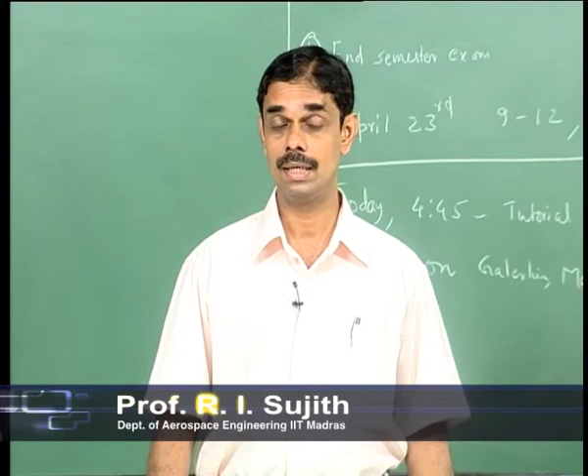In the beginning, we came up with two techniques. One is a frequency domain analysis, or the harmonic domain analysis, which we went after doing with eigenvalues and so on. Afterwards we did analysis in time domain, and we looked at not just normal modes, but the problem with having non-orthogonal eigenmodes, and a lot of machinery associated with analyzing such a problem.

But in either approach, whether time domain or frequency domain, we need to supply a model for heat release, which depends on how the flame responds to velocity or pressure oscillations around the flame. In different combustors, this mechanism differs. For example, in a rocket motor, the propellant responds heavily to pressure oscillations, because pressure fluctuations alter the way the flame stands above the propellant surface, and this has a strong influence on the reaction rate and the mass flow fluctuations coming out of the pyrolyzed propellant.

Now, whereas we looked at premixed flame, where the pressure dependence is very weak but it is mainly a velocity fluctuation dependence. Velocity fluctuation affects the flame through some kind of wrinkling, and we constructed a model by solving a kinematic model. We solved the G equation for the wrinkles, and saw that the wrinkles propagated up with a time lag associated with it. We derived an expression for the wrinkle, from which we can get the area fluctuations, and the area fluctuations translate to heat release rate.

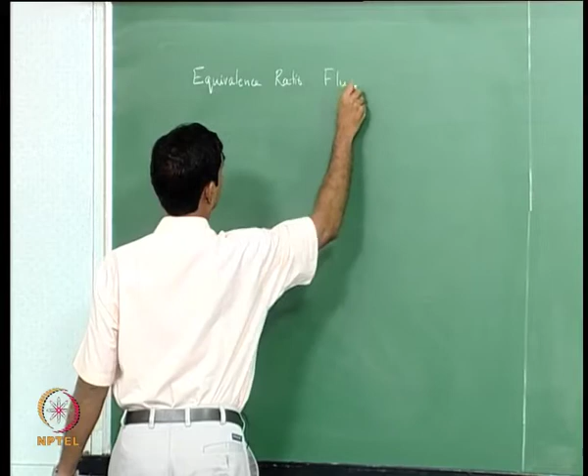So normally we would say that in a combustor, it burns at a certain equivalence ratio. So what is meant by equivalence ratio fluctuations here? You set the fuel flow rate and set the air flow rate, and you have a certain equivalence ratio. So what is meant by equivalence ratio fluctuations? Can you try to imagine? Viksha?

The mass of the fuel and the ratio of the fuel mass and oxidizer mass sort of varies, and it's not burning at... Why is it? Why will it vary? Can you imagine? The pressure fluctuations may pass on to the injector, and that may sometimes reduce the mass flow rate of the fuel and sometimes increase it. Yeah, absolutely perfect. That's a very good answer.

So in the 80s, nitric acid rain and sulfuric acid rain were considered a big problem, and people wanted to make combustors which would lower nitric acid rain. Nitric acid rain means you have NO and NOx going up in the atmosphere, then it mixes with water vapor in the clouds, and the rain has a concentration of nitric acid or other acids. Specifically we are worried about nitric acid here.

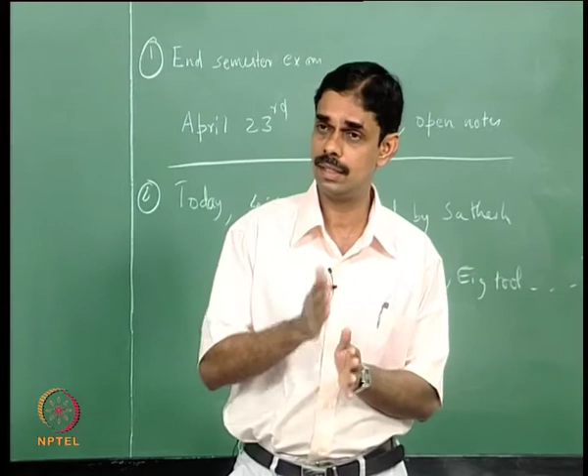Below some limit for a premixed flame it won't burn - that's the flammability limit. People try to do premixed burners because they have low soot production, and if you burn near the lean limit you have very low NOx. That is what they found out.

Now can you imagine why NOx would be low if you burn lean? Low temperature - yes, absolutely. Low equivalence ratio leads to low temperature. You can also have very high equivalence ratio and get low temperature, but then you are wasting fuel and there will be a lot of unburned hydrocarbon, soot, and all that. So we cannot burn rich, so we burn lean.

Now, why would NOx be low when temperature is low? Nitrogen won't react - yes, at low temperature the NOx production is less, so at least one of the ways of producing NOx is reduced. So people have understood that if you lower the temperature of combustion you will have less NOx. So wonderful, you proclaim that you have solved all the problems of nitric acid and so on, keep all the environmental activists and left wingers happy, and then you make these combustors and then some unintended consequence happens.

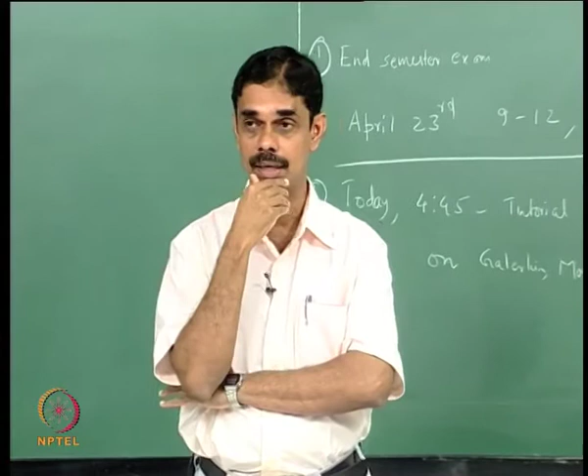What would that be? Instability. So when you go to lower and lower limits, the performance of NOx reduction is very good, but then the flame speed starts to become a very strong function of equivalence ratio, and the ignition time delay is getting bigger and bigger. So these conditions become very conducive to forming thermoacoustic instability.

So that is what we will talk about. Let me first give you a reference for this - it is a very good PhD thesis.

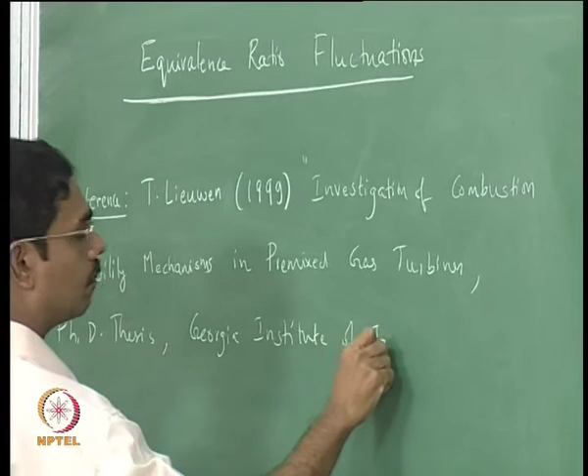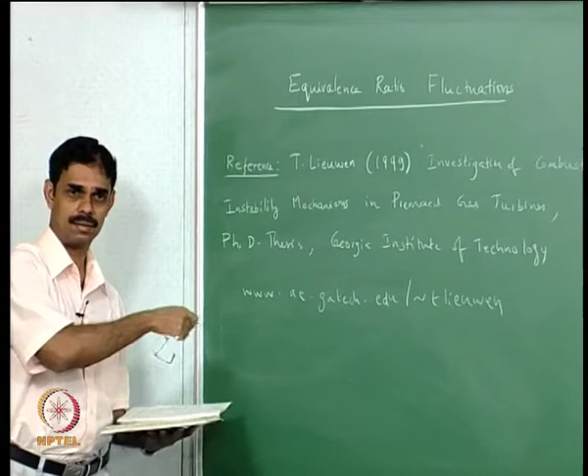You can download it from - so this is a PhD thesis done on the subject, a good slow introduction to it, but there are also a lot of papers on this. I also have to give you some historical insight behind this.

So the combustion instability research was very strong in the 60s and 70s, driven by what? Do you remember? Space program and missile program. The big rocket programs had a lot of instabilities, and they made enough number of motors.

So you try to make a lot of motors, but eventually have certain motors which are working, in which they somehow manage to solve the problem, minimize it, or live with it, and then you can run your program with a combination of this number of motors. If you want to double the thrust, you try to make a big motor. If it doesn't work, put two of the old rockets together, kind of like tied with a rubber band - not quite - and if you want four times the thrust, in case you fail with a big motor, you can put four of the small motors.

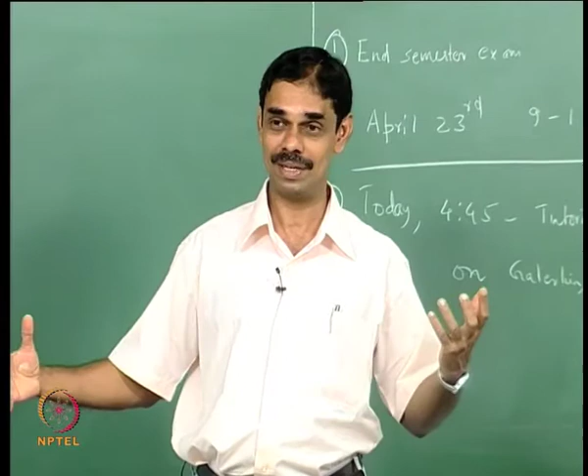Somehow people found ways to get around it, because this is a subject nobody understands. So if you don't understand something, you generally wouldn't feel inclined to watch it. It's like watching an art movie or a sport you don't understand - if you don't understand the rules, the program managers have no clue what this thing is, so they are not interested in funding it because this is always there, but they know somehow somewhere it can be fixed.

So once it's fixed, you use those motors. So what happens to the scientists who work on it? I mean, they are like - I don't know, there's this curry leaf - after use you throw it out. So it's kind of the way it is, because this is a weird subject.

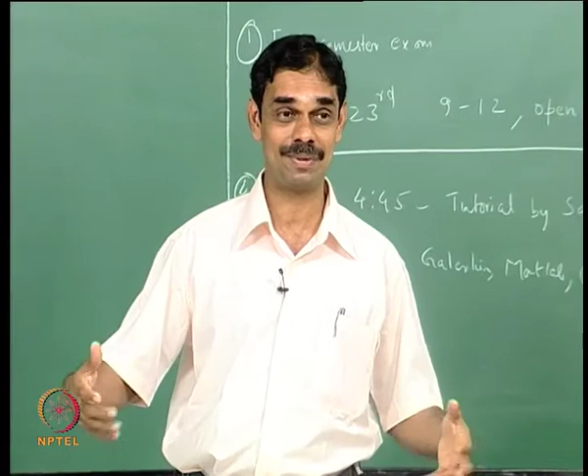It is not like gas dynamics or something where you analyze and from that you can go to propulsion, build an engine and so on. This is like, okay, if something blows up, I can tell you why it blew up or something like that. So we are not doing anything constructive - it's like the role of a policeman. First the robber has to rob, then you catch the thief, and the policeman isn't good enough to intimidate the robber and stop him from robbing. So at least that's the state it is.

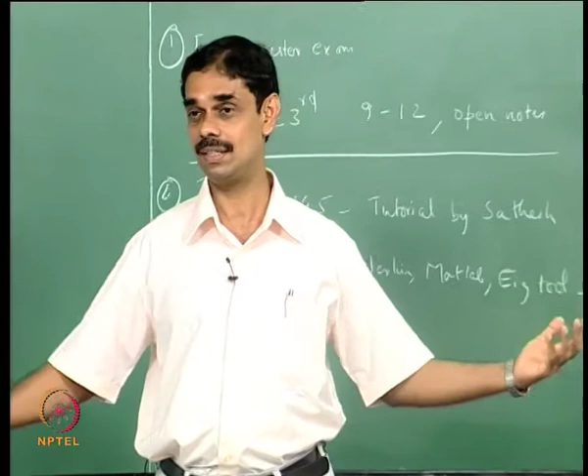And then the research went into a lull, and a few people still hung around trying to do pulsating combustion, using acoustic oscillations to increase productivity, and that kind of appealed to the managers, because when combustion instability happens, your heat, mass transfer, and momentum transfer increases - so it creates all kinds of problems in rockets.

They said, okay, you take a cement plant, you put sound with a pulse combustor and make the droplets evaporate faster, or try to make milk powder evaporate faster, or burn waste in the presence of high amplitude sound. Waste which would normally not burn starts burning because of the intense heat and mass transfer and so on.

So a few people hung around there with this subject of pulse combustion, almost getting out of business. Then came activists who wanted to get rid of nitric oxide, and suddenly the combustion scientists woke up, getting jobless with no new thing. So they proposed this Low-NOx idea, companies bought it, made it, and bang, instability came, and suddenly all of us got into business.

We were almost losing our jobs, because it's like policemen losing their job when there's no crime, and suddenly crime comes and then you are busy. So suddenly instability comes on and people are busy.

So this got everybody going in gas turbines. Before, in the 60s, 70s and 80s, people didn't worry that much about gas turbines. One thing was NOx performance improving. Another thing is, once you have an engine, they will improve this, improve that, and somehow get more and more megawatts out of the engine.

So if some engine starts giving 100 megawatts in the beginning, you tweak it and it becomes 110. There will be version 1, version 2, version 3, then version 3A, B, C, D, E, finally version 6F or something, and by then that 100 megawatts will have gone to 180, 190 megawatts.

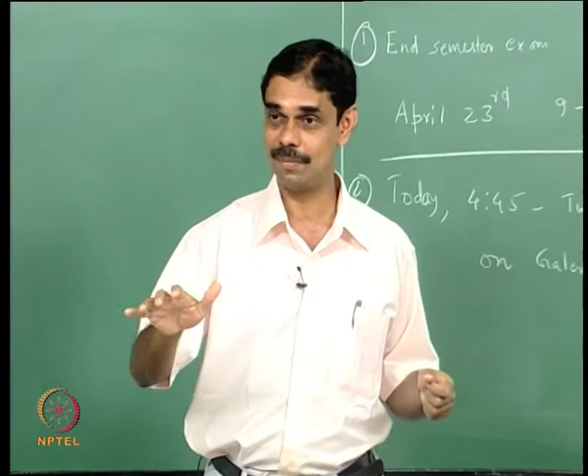So we are really pushing. It's like I told you, if you push somebody too much and they are performing very well, they can go crazy, or like a sportsman, if you push too hard you can get injured right before the tournament.

This is kind of what happened in gas turbines. They were there, but not performing to that level in the beginning. Now they are performing at incredibly high levels of efficiency and incredibly low pollutants, and then instability struck.

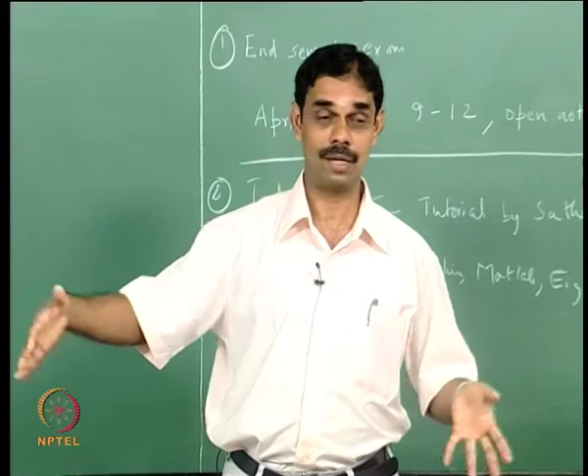So all the guys who were closing their shops with rockets and so on came back to study instability in this, and thankfully the problem has not gone away yet, so we are still in business. I think it's important to understand how the technology evolves, and someday this will be stopped, and I don't know what else comes at that time.

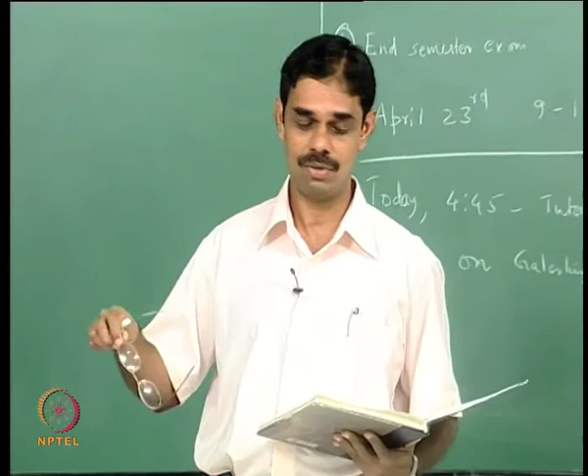So here we are, I'm going to analyze it, but since I will not explain how to do the acoustic analysis again, because I already explained it, what I will do is concentrate on how the heat release rate has to be calculated, or how it is affected by the fluctuations. Then I assume two different methods, one is a time domain analysis, one is a frequency domain analysis, to solve for the acoustic field.

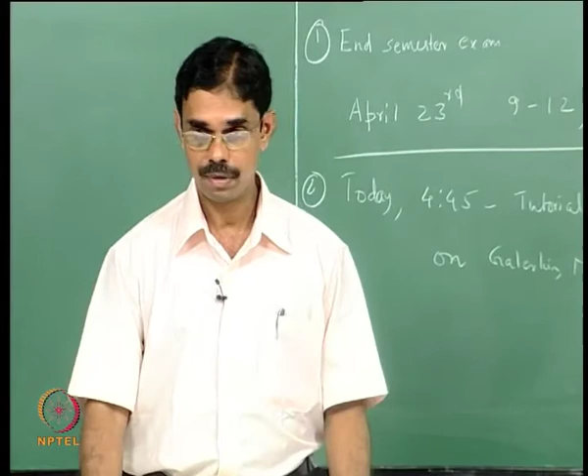So here we concentrate on the perturbations of heat release rate of a flame, with particular emphasis on the role of equivalence ratio fluctuations. Everything is the same, we have feedback between acoustic waves and heat release, and that is what makes the instability. There is no difference in that. The only difference is how the perturbation in heat release is coming.

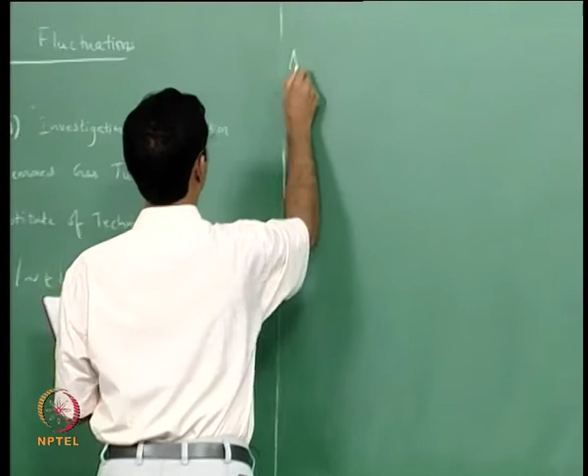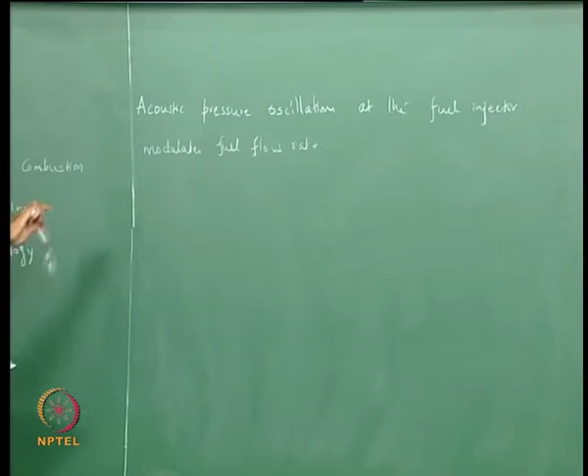Acoustic perturbation of velocity or pressure at the fuel injector, usually acoustic pressure at the fuel injector, will fluctuate, and that will modulate the fuel flow rate. The velocity fluctuations will also modulate the airflow rate. Similarly, acoustic pressure oscillations and velocity oscillations will modulate the airflow rate, and so therefore we will have equivalence ratio fluctuations.

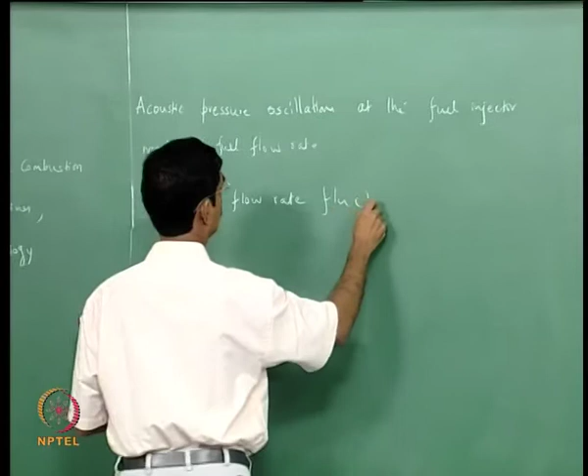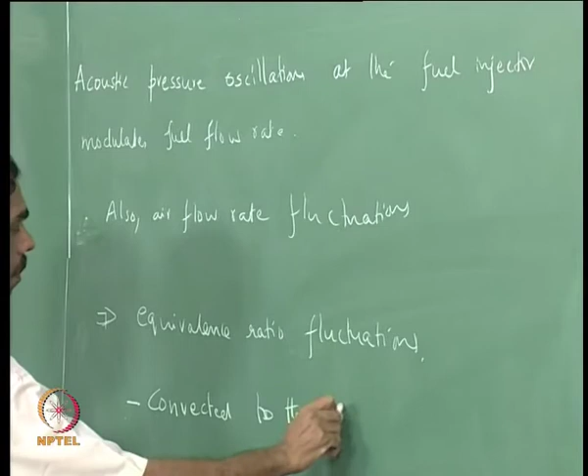So this will lead to inhomogeneities in equivalence ratio, and they are convected through the fuel air premixing section to the flame front, where they modulate the heat release rate of the flame. So these equivalence ratio fluctuations are convected to the flame, and of course there is convection, so naturally there will be convective time lags also.

And we know that we love time lags. If there is a time lag, you have a chance, under some conditions, of things going unstable. This mechanism is very significant in lean premixed pre-vaporized combustors.

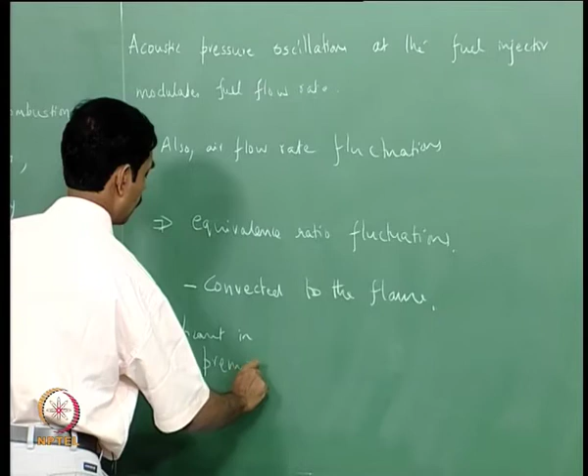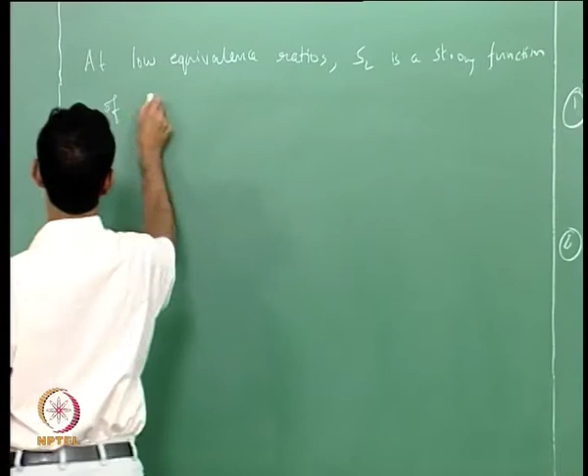I must emphasize that at low equivalence ratios near the lean blowout limit, the flame speed SL is a very strong function of equivalence ratio. So a small disturbance in phi can make a large disturbance in SL, which will lead to a large disturbance in heat release.

So I will draw a schematic of this combustor. We will draw a schematic of a combustor. I am sure the actual combustor is much more complicated than this, but...

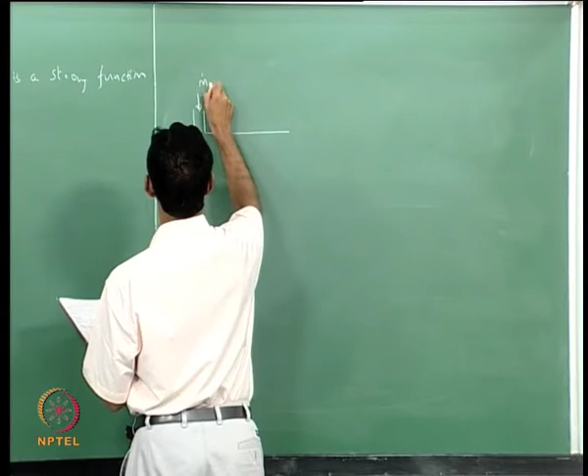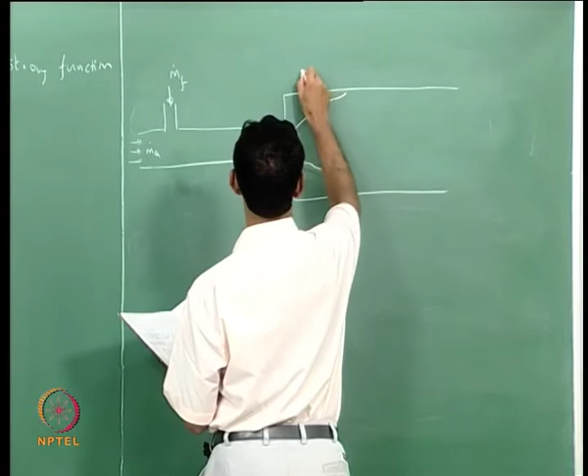So this is the heat release zone. There will be Q prime here, and there is phi prime coming here. Now, subscript I denotes fluctuations at the inlet. That's it.

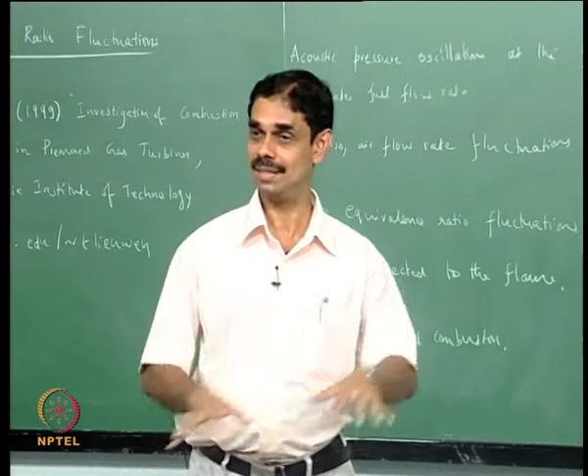Before I speak further, I want to ask a simple question. You have a separate fuel line and separate air line, and I showed you an example of a combustor where we had a pre-mixed flame, with a pre-mixer, then another mixing chamber to damp out everything, and then the tube coming, and it was absolutely pre-mixed. Why are we calling this combustor pre-mixed, although we have air flow rate coming here, mass flow rate, and fuel flow rate coming separately? Why do we call it that?

By the time it reaches the combustion zone, it's mixed. So why don't you mix it in a big tank and send it? This is not only about safety - in cases of aircraft combustors and all, we have air coming in, so fuel we have to mix on the way.

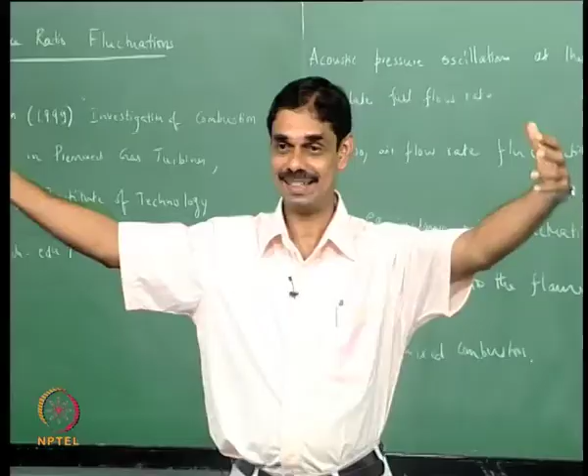Now you can make a big box or big tank and mix the fuel-air mixture instead of having a fuel cylinder. You can control the equivalence ratio based on demand, and switch off the flame whenever you want. In the other case there will be a lot of... you can turn it off with a valve. But one important point is you can make a very fast local adjustment of equivalence ratio. If it's in a big tank, it will take quite some time to adjust things.

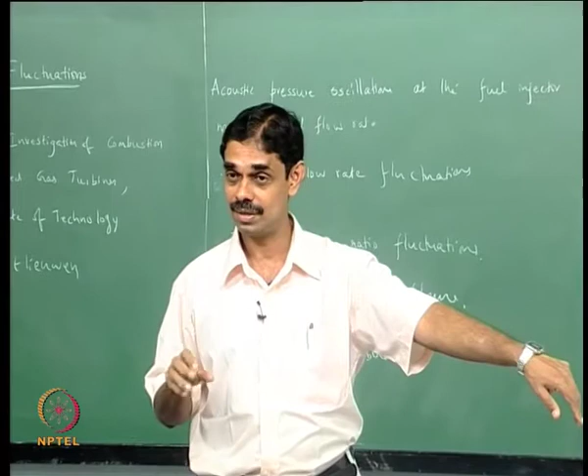In an aircraft, you cannot have a separate tank, so these combustors are used in aircraft. It is not a premix flame, by the way - it is a diffusion flame, burning liquid fuel, so we are not talking about that. We are talking about gas burners which burn natural gas or whatever gas is available - mostly a gas burner. Even if it's a liquid fuel, you can have injectors here to pre-vaporize the liquid - LPP stands for lean premix pre-vaporized. Or you can have natural gas coming in.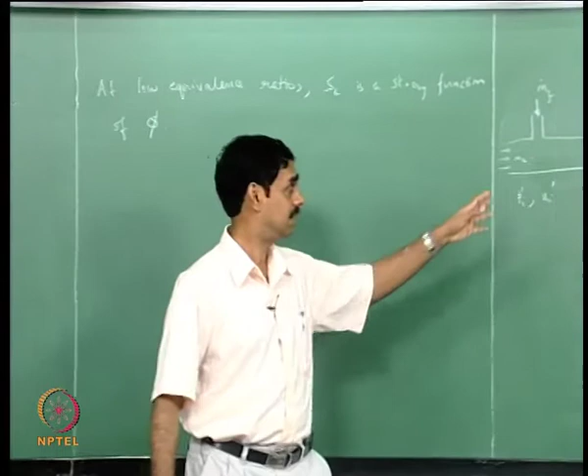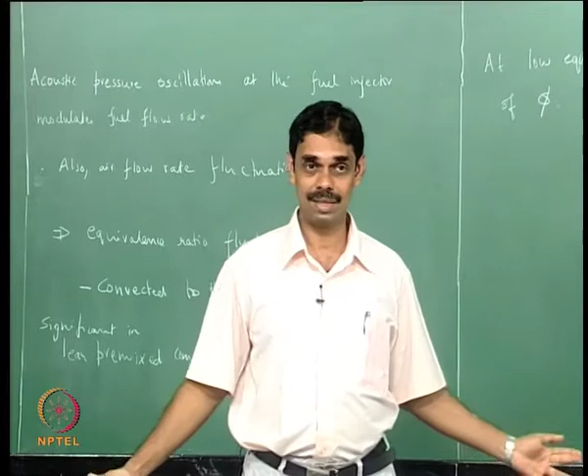So why are we not calling it a diffusion flame or non-premixed flame, given that it's mixed in this tube? I think safety is the predominant reason - these burn a very large amount, several kilograms per second, and big ones may burn hundreds of kilograms per second or even tons per second. So it's a lot of mixture, and if you have a big cylinder, you'd have to pressurize it because otherwise you cannot store it - storage volume would be huge. If there's an explosion, it would be unbelievably damaging. Even with protection, this approach just isn't viable.

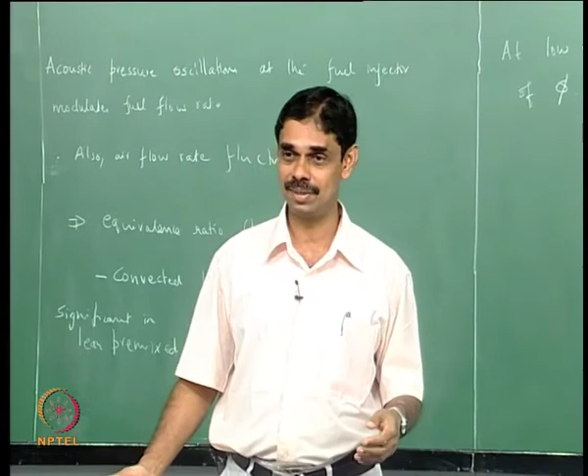So this is called an industrial premixed combustor, or the Germans call it 'technically premixed' - a lot of Germans worked on this, German and Swiss companies like Alstom. That's German English, like how Germans call industrial aerodynamics 'technical aerodynamics.' But that name is now in English usage. So it is called industrially premixed or technically premixed - by the time it reaches here, it's like premixed. I hope this is clear.

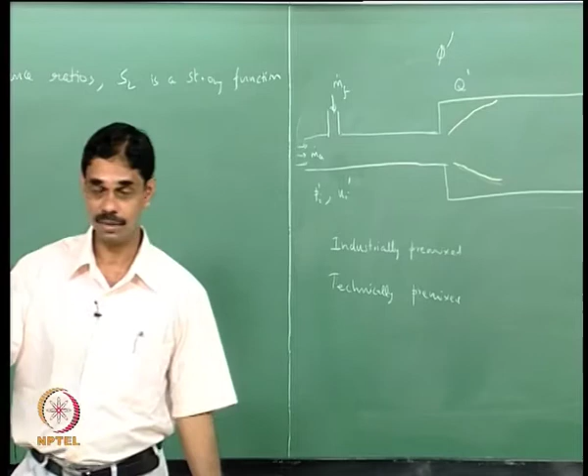So the fluctuations in equivalence ratio are created or generated by acoustic waves. They travel upstream in the combustor and come here - that's what I denote by P prime and U prime. Some of the waves come here and modulate the fuel and air. So how does it physically modulate the fuel flow rate? Anviksha already answered it - can you repeat the answer? Is it the velocity or the pressure which modulates the fuel flow rate, and why does it do it?

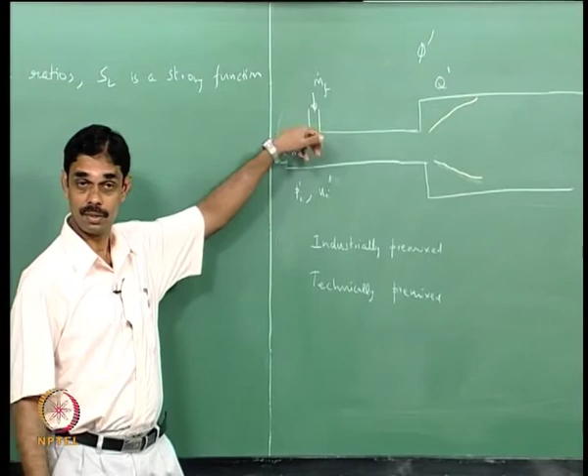Sometimes more fuel comes faster, sometimes less. When is more fuel coming and when is less? When the pressure goes to a minimum, it allows more fuel to come. So when pressure here is low, you have a higher delta P, and so more flow rate comes. When you have higher pressure, at the acoustic wave's maxima, there's less pressure drop, so the flow rate will be less. If you think quasi-steady, the fuel flow rate will oscillate approximately like the square root of delta P. When would this mechanism not work?

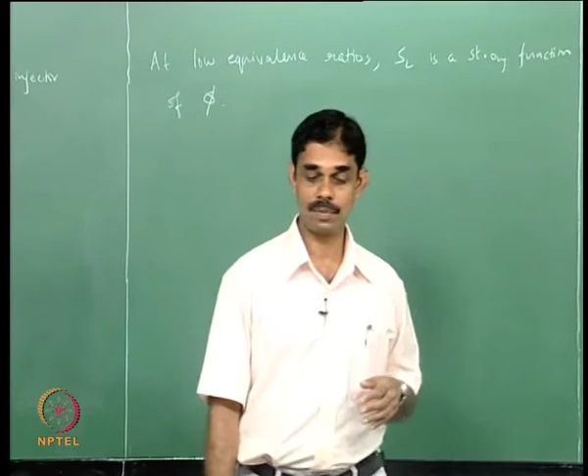Sir, but pressure difference is what determines the flow rate, the mass flow. What is the formula that determines the ratio? So m dot... choked.

There are some factors: 2 over gamma, 2 over gamma plus 1, to the power gamma plus 1 over gamma minus 1. I do not remember the exact factor, but there is a constant times P naught A star over square root of T naught. Under incompressible flow situations this whole thing can be written as, effectively, square root of delta P. So when you go to Mach 1 and beyond, you have to use this compressible formula instead.

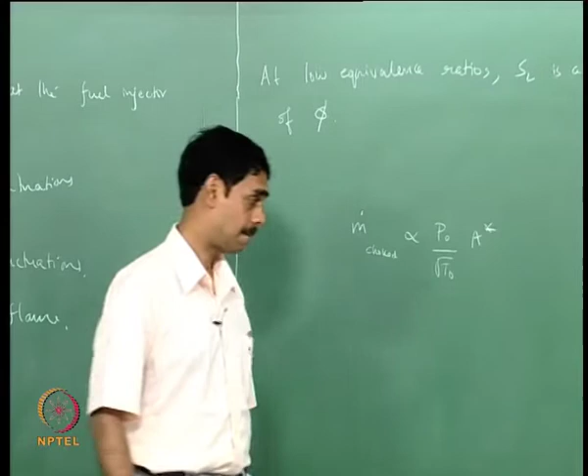And why would the air flow rate oscillate? We have a very good explanation for fuel flow rate oscillating, but why is the air mass flow rate, m dot A, oscillating? U prime. Why? Because mass flow rate is proportional to U prime.

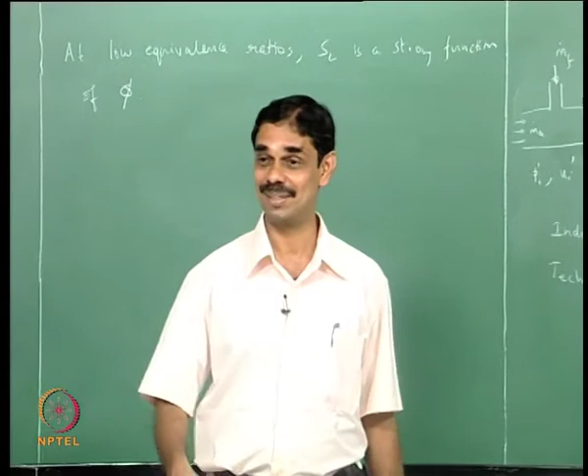M dot is rho A V. We remember this formula, and we don't assume rho A V is constant. If V is fluctuating, then m dot is fluctuating. So we have both velocity fluctuations and pressure fluctuations, and both are important. Velocity causes fluctuation in the air flow rate, and pressure fluctuations cause fluctuation in the fuel flow rate.

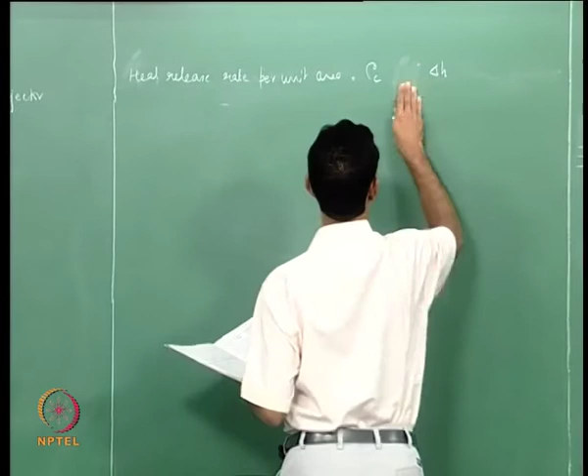Rho C times S is the flow rate consumed, and delta H is the heat of the reaction. Because the equivalence ratio is phi, only phi times delta H will be released. So this is the formula for heat release rate per unit area. I'll call it Q dot.

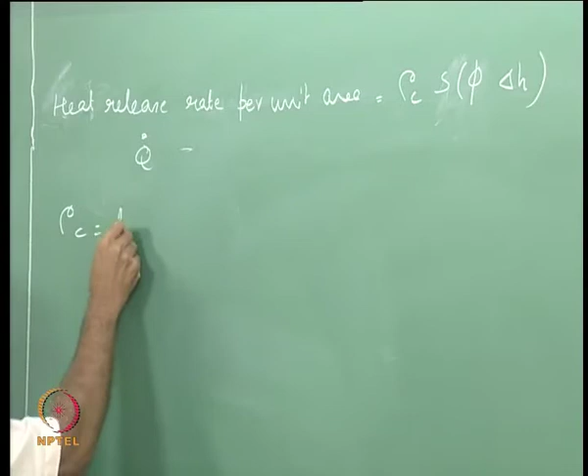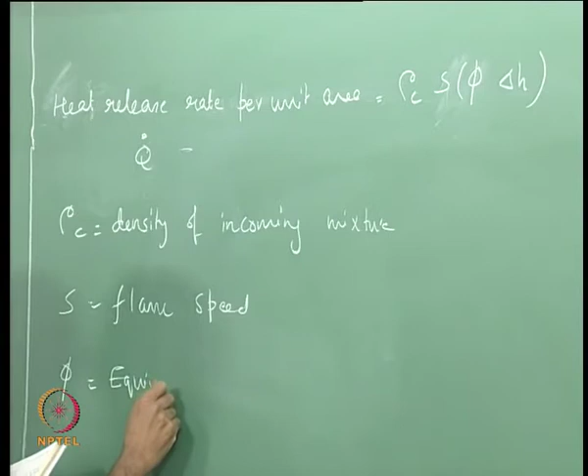Rho C is the density of the incoming mixture, S is the flame speed, phi is the equivalence ratio.

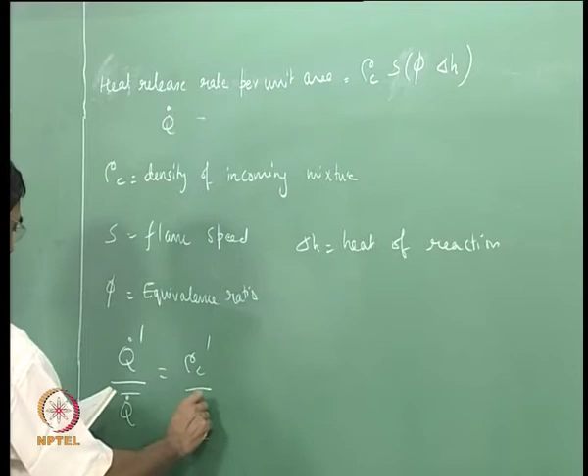I did not write S_L, I wrote S, because a combustor need not have a laminar flame—surely industrial combustors would not have a laminar flame. So if you are talking about a linear system, Q dot prime by Q dot bar equals rho C prime by rho C bar, plus phi prime by phi bar, plus S prime by S bar.

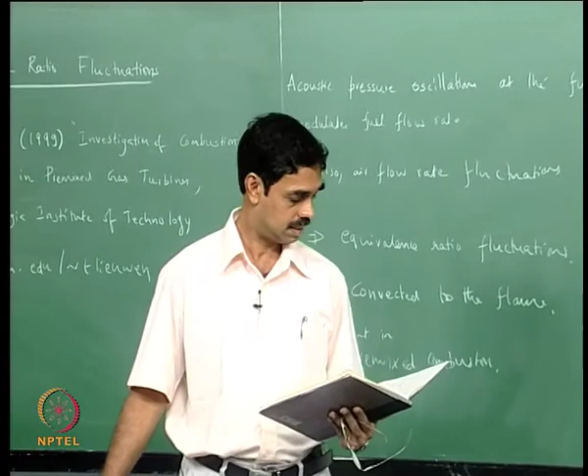If you are talking about low Mach number combustors—aero combustors will have somewhat higher Mach number, like 0.2, 0.15, 0.25—but domestic burners or industrial power generating units have very low flow, so under those conditions this term may be negligible for low Mach numbers. So we will drop this term and keep the others.

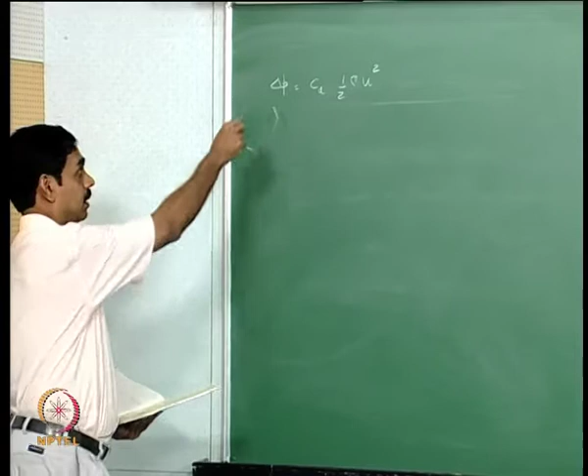So CD is the discharge coefficient, and for low speed flows you can write this formula, so delta P prime is like minus P A prime, assuming we neglect the fluctuations in the pressure in the fuel line.

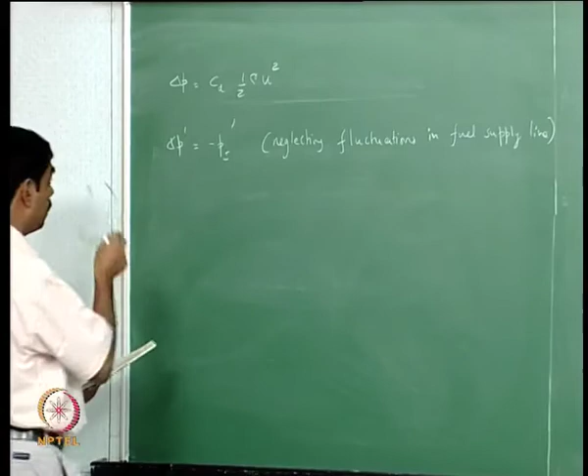So m dot f will be proportional to u, so you can say m dot f prime by m dot f bar equals minus pi prime by 2 delta p. If you take log and differentiate, you get delta p by p goes like 2 delta u over u, so that is where you get this relation.

Now we will look at the total equivalence ratio.

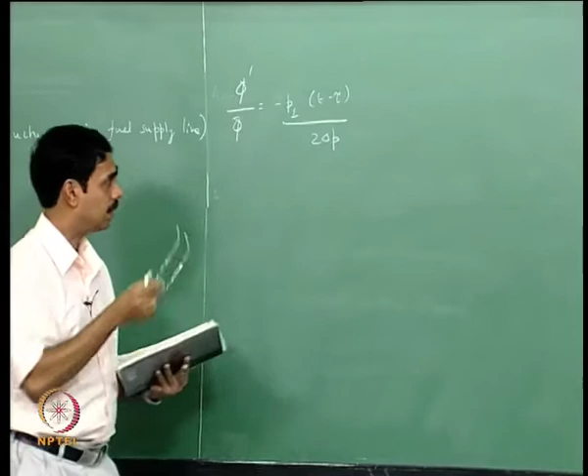I must emphasize that although this is at the inlet, the pressure at the combustor actually arrives after a delay time of t minus tau, a delay time of tau—minus u prime of t minus tau divided by u bar. So this is the fluctuation in velocity at the injector.

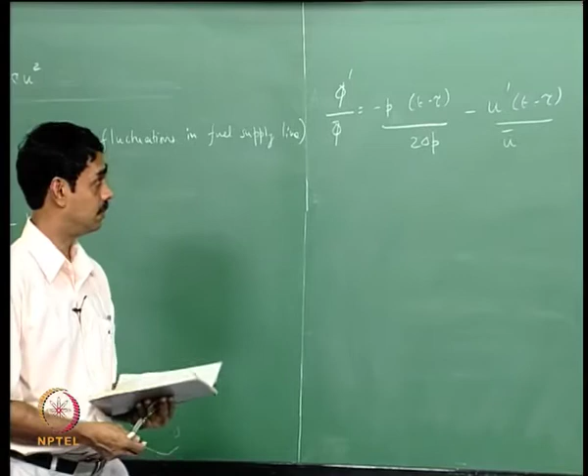Because of the fluctuation in velocity, sound has both velocity and pressure fluctuations. So when the velocity fluctuates—if it's increasing, the air flow rate increases, if decreasing, the air flow rate decreases. So that also causes the oscillatory air flow rate, and together they contribute to equivalence ratio fluctuations.

Yes, the flame speed depends on the equivalence ratio.

I can say S in general has various correlations, but some of them are of the form S is proportional to phi to the power A.

So ds over... S prime over S bar is equal to, you can do some simple differentiation and derive this, but you can try this at home. So you can take log S is A log phi, then S prime by S goes like A phi prime by phi bar, very simple.

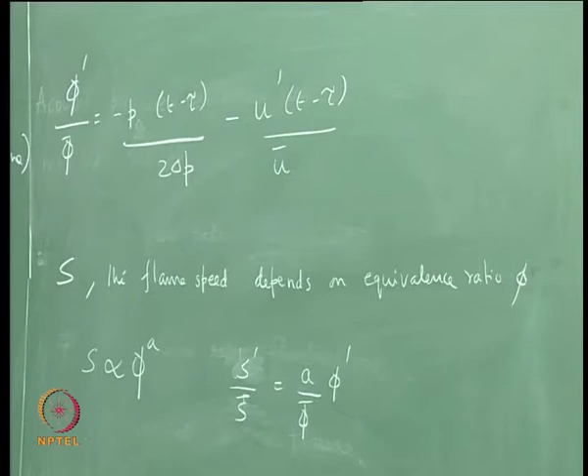So Q prime by Q bar is phi prime by phi bar plus S prime by S bar, which is A phi prime by phi bar, which is 1 plus A into phi prime over phi bar. This A can perhaps be somewhat large near the lean limit, and therefore for a given phi prime by phi bar you may get large Q prime by Q bar because A is larger than 1.

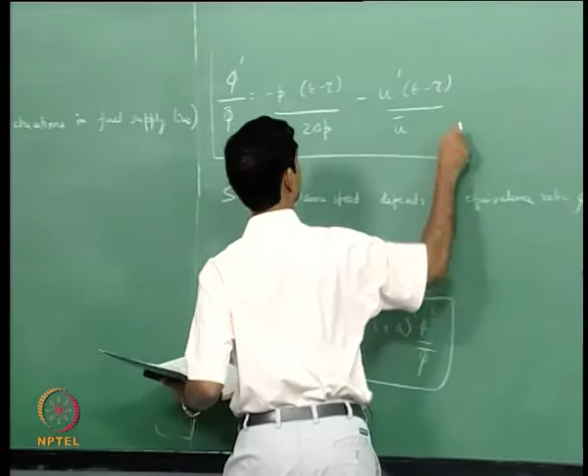So we know a relationship between heat release fluctuations and equivalence ratio fluctuations, and we know how equivalence ratio fluctuations depend on the acoustic fluctuations. We just derived this relation. So if you substitute this into this, you have the final answer.

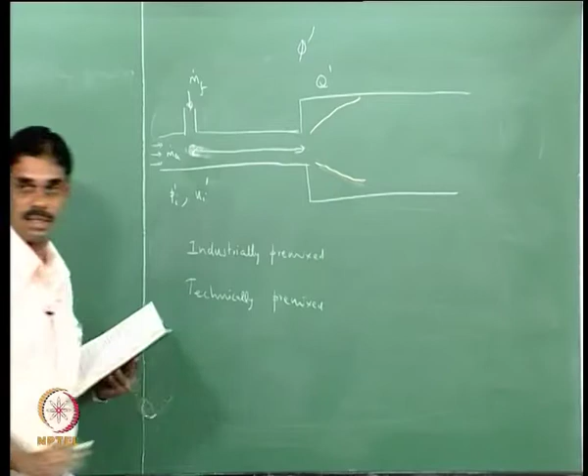So in the harmonic domain it will be plus A... sorry, I must keep the subscript i here. That's not really a mistake - the pressure at the inlet affects this, and then you have an equivalence ratio fluctuation. It takes a certain time tau to get convected here, and only after that it burns. So you have the fluctuation here, and it travels this distance by a convective time delay, and then it burns.

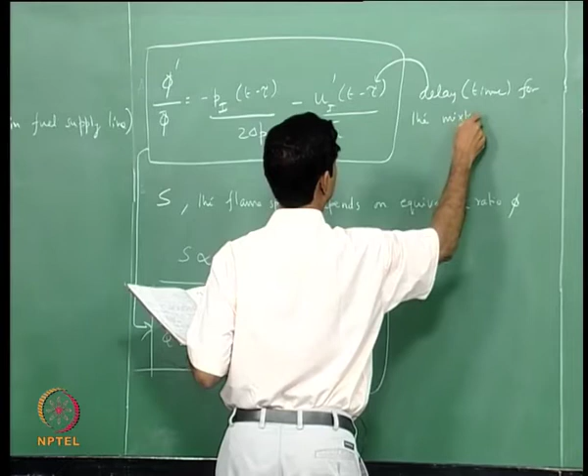So the tau comes from the delay, or the time for the mixture to reach the flame. Here the order of tau will be, yeah, it's of the order of convective time, L by U.

And pi will have a relation to p, which is of the order of L over C. So the total delay with respect to pi, as in pi is delayed with the combustor, p to pi would be like L over C, and pi to p would be of the order of L over U. So L over C plus L over U, which is L over U into U over C plus 1, so L over U into 1 plus M. For M small, it will be of the order of L over U. If M is small, let's say 0.01, then it's L over U times 1.01, so it's close to L over U.

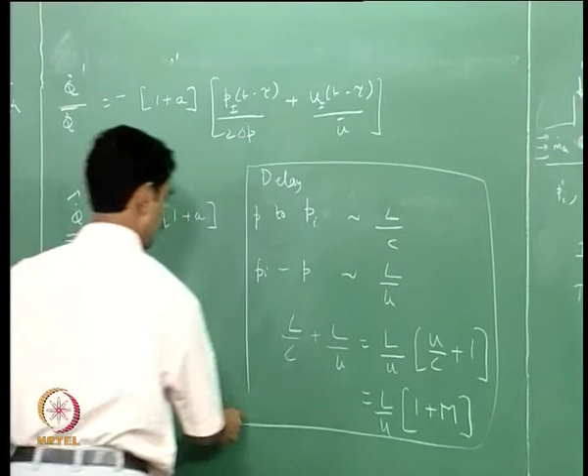As a reference, Lieuwen's PhD thesis works out examples with various time delays between processes and heuristically calculates when things become unstable or stable, even before doing the calculation of eigenvalues and so on. I think it's a good exercise to walk through that.

Did that answer your question? Yeah, okay. Thank you. Speak loudly so that the question is heard. Shout. Yeah, this is not related to this.

Is the acoustic flow generally laminar, or can there be turbulent acoustic flow - the U prime? This is a very tricky question. How to define turbulence comes down to what is acoustics and so on, but it all depends on what you see. If you have hydrodynamics and acoustics decoupled, then there is no problem - hydrodynamics has turbulence, and at low Mach number acoustics is not coupled. But then they are coupled.

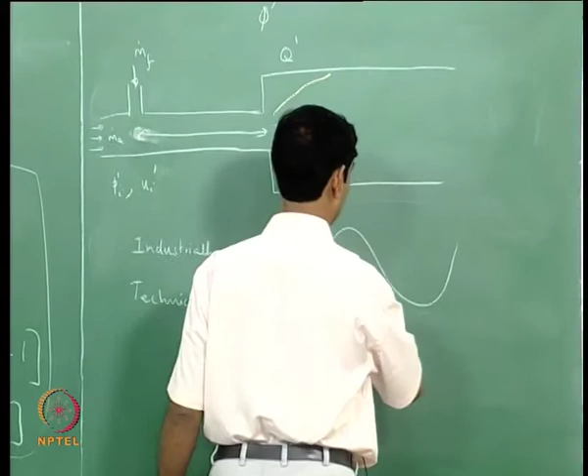The way to see acoustics would be to do phase locking or conditional sampling - you know the acoustic frequency, so you look at the signal at various times and reconstruct it together. So let's say we have a reference signal somewhere that keeps repeating. I take values at this phase, this phase, here, here, here, all over. Then if you construct the velocity from this bin, you will actually see lots of fluctuations riding on a mean.

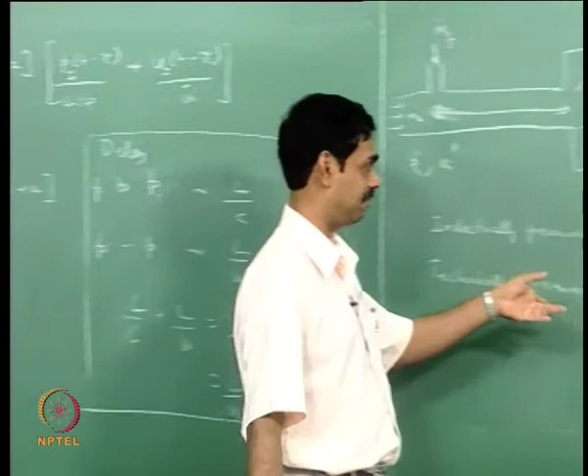So you have a clean pressure signal, or you can even take a tube, connect a loudspeaker to the combustor and drive it with a sine wave, and phase lock the signal with that. I have seen experiments like this - one of my friends used to do it - and you would see a lot of fluctuations on top of the signal that is phase-averaged at the acoustic period. So could you call this turbulence? Perhaps, but that's difficult, because we can't quite separate non-uniform flow and heat release fluctuations - hydrodynamics and acoustics are very coupled.

So what would acoustic be like? You average everything which are... let me see, you average all the fast scales, and then you see hydrodynamics, and in space you average, and then what you see would be like acoustics. That's one crude way of answering. Anything which is of the order of acoustic, like velocity of sound, will be acoustic, which has a time and velocity component.

I think what you have to do is, if you are looking at it theoretically, you have to look at the eigenvalues of the linear operator, and if that is C, you can call that fluctuations and acoustics. If it is experimentally determined, you put pressure probes at two locations, cross correlate them, and see what is the delay between them. If that is speed of sound, then you can say there is something acoustic to it. But there could be mixed modes, and I think these are not analyzed. It's all a topic of current research, so this is like a half-baked answer, but a very good topic to do research on.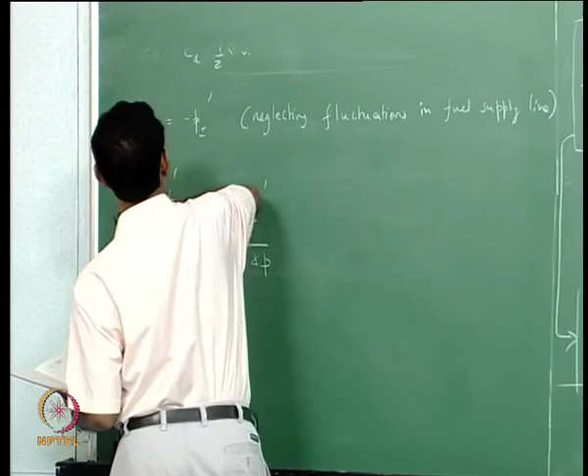Between 0 to 1. A can be higher than 1 if you go towards the lean side. I don't often remember the value, maybe I can tell you next class.

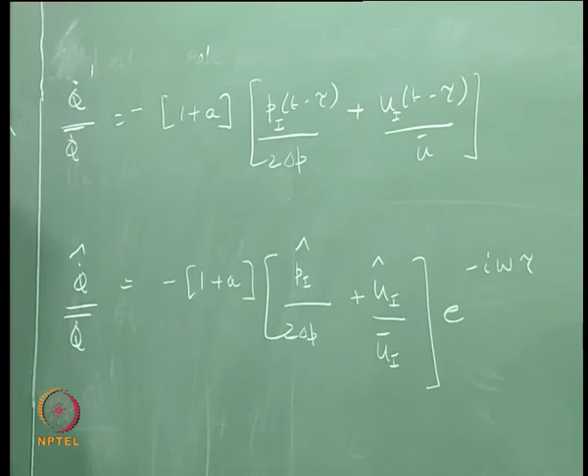So we have a time domain. We have a heat release expression in time domain, and we are expressing heat release in the frequency domain. Now we have two different methods of analysis, one in time domain and one in frequency domain. So plug this in, and then we can calculate our eigenvalue or a time series, and then you can look at the eigenvectors, or you can see the evolution of the system and so on.

Okay, now let's look at some numbers. We look at a choked inlet where there is no fuel flow fluctuations. This is an example given in Lieuwen's thesis. So, no fuel modulation, phi prime by phi bar equal to...

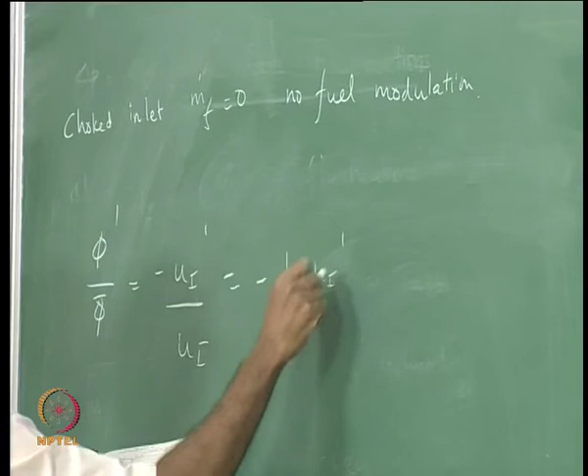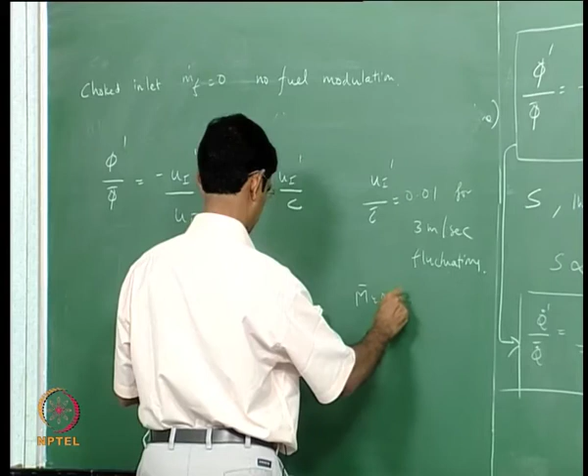So let's look at how these numbers are. u prime by c bar is 0.01 for a 3 meter per second fluctuation of that order, and m bar will be 0.05 when u bar equals 15 meter per second. If the flow velocity is 15 meter per second, then m bar is 0.05. So phi prime by phi bar is of the order of 0.01 by 0.05, equal to like 20%.

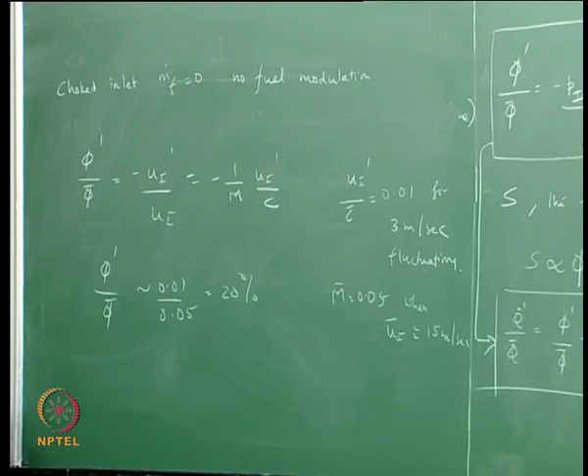So you can have substantial phi prime by phi bar, and that can lead to substantial heat release oscillations.

There is one more issue involved here other than this instability leading to oscillations. When you have very large amplitude oscillations and you are at the lean blowout, whether the flame stays or not depends on whether locally somewhere the radicals are there and the flame velocity matches the flow velocity. But if you have very large amplitude oscillations, the flame may blow out.

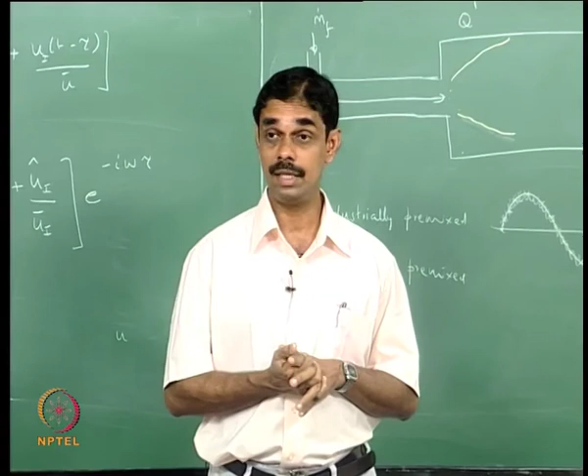So under very lean conditions, these thermoacoustic oscillations can lead to lean blowout. We can't quite operate the combustor as close to the lean limit as we want, because we can blow out. So you will have to always have a factor of safety where the oscillations don't trip the flame to blowout. In this case, even there can be situations where the mixing becomes improper because of the acoustic.

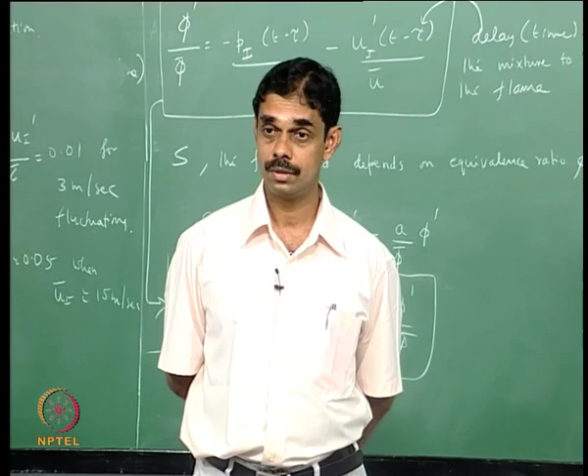Mixing becomes improper? Because here there is that duct in which mixing happens. Yeah, and the blowoff can be because the mixing is imperfect. Mixing will actually be very good, I think, when there is acoustic oscillation, so that is not the reason, but I think the stability itself will be altered. So blowoff happens when... yeah, I think it needs some elaborate explanation. I will not get into that, but I think the flame cannot be stabilized under large amplitude oscillations. Mixing will be better, will be much better actually. So that is not the reason.